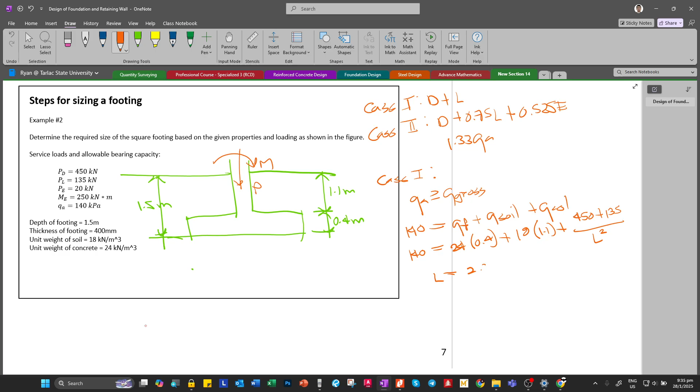So L is equal to: 140 equals 24 times 0.4 plus 18 times 1.1 plus 450 plus 135 divided by L squared. So L is 2.3 for case 1. To double check, substitute lang natin ito ng 2.3. So 139. Okay. Case 2.

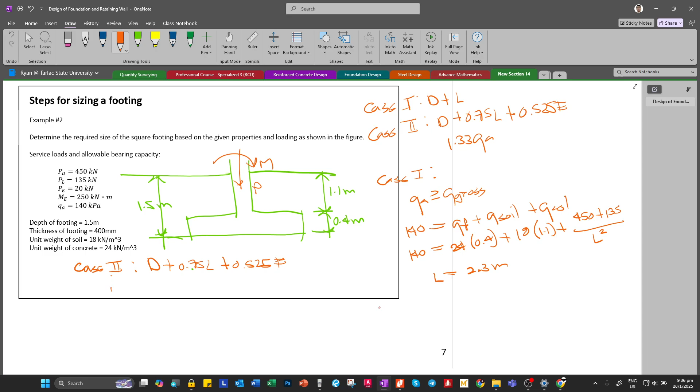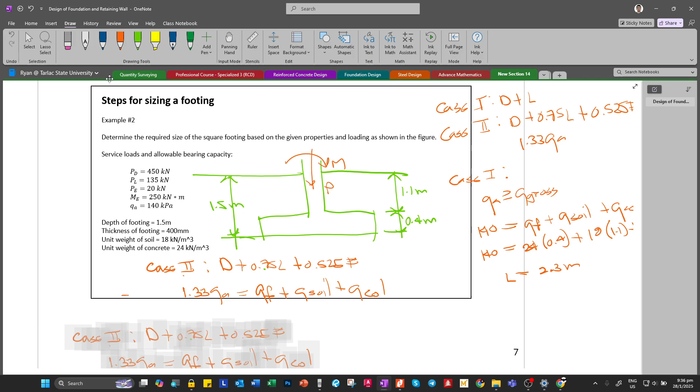Case 2. Dead load plus 75% of live load plus 0.525 E. The allowable bearing pressure can be increased to 133%. So 1.33 QA equal to Q footing plus Q soil plus Q column. I-shift lang natin ito. So una, yung pressure due to the footing,

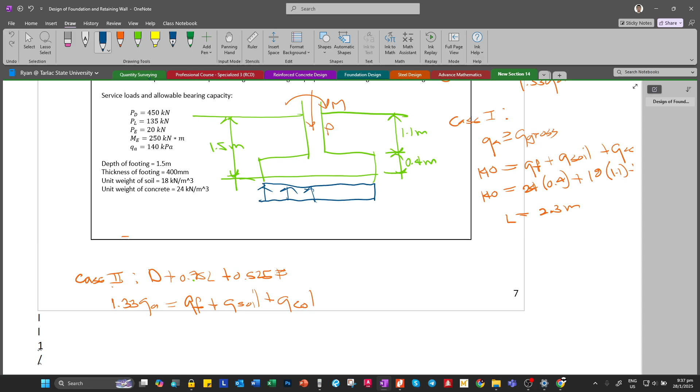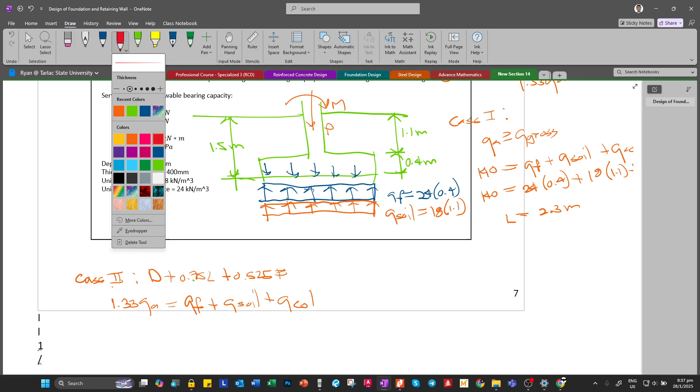so ito, Q footing, uniform yan, equal to 24 times 0.4, and then Q soil, 18 times 1.1, and lastly, dahil meron nang moment doon, di pa natin alam kung trapezoidal or triangular pressure. To double check, let us compute it.

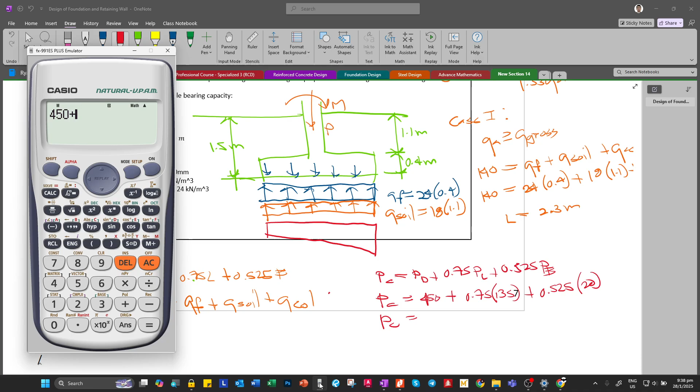So kunin muna natin yung mga unfactored loads. P column equal to PD plus 0.75 PL plus 0.525 PE. Ilan ito? So 450 plus 0.75 times 135 plus 0.525 times the earthquake load. So 561.75.

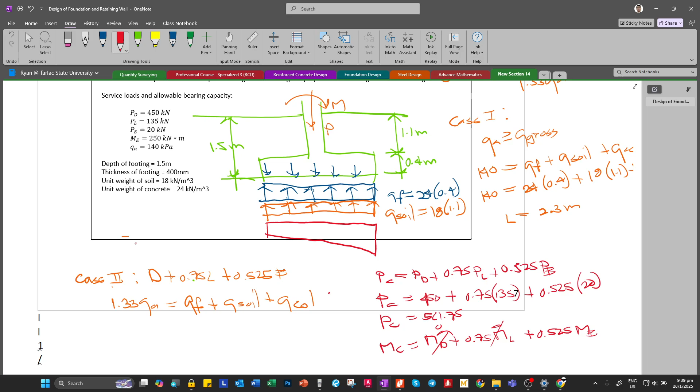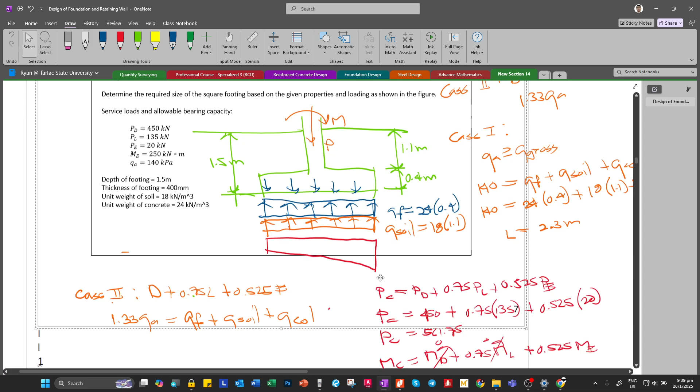The same is true for the moment: MC equal to MD plus 0.75 ML plus 0.525 ME. Zero din yun. So MC is equal to 0.525 times the earthquake moment, 131.25 kilonewton meter.

Double check natin kung yung eccentricity nito will exceed the critical eccentricity. But since wala pa tayong L, we will assume muna na the pressure is trapezoidal. Mamaya double check natin siya. So 1.33 QA, 1.33 times 140, equal to 24 times 0.4 plus 18 times 1.1 plus PC over A plus, ito yung kailangan natin sa Q column max, M column c divided by I.

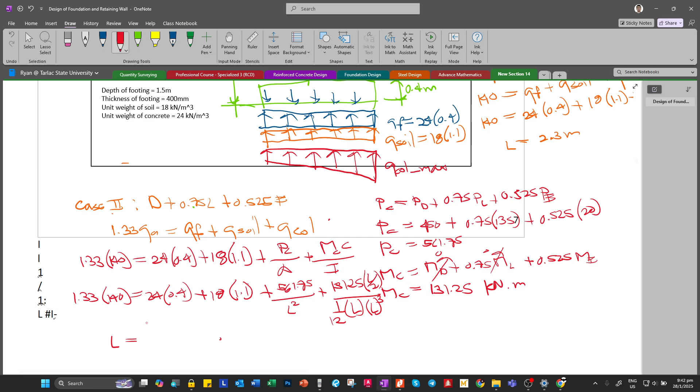So 1.33 times 140 equal to 24 times 0.4 plus 18 times 1.1 plus PC 561.75 divided by L squared plus M 131.25 times L over 2 divided by 1 over 12 L times L cubed. So solving, with x squared and 131.25 times x over 2 divided by 1 over 12 times x raised to 4, L is 2.4 meter.

So double check kung trapezoidal ba yung magiging net pressure due to column load. So L over 6, this is the critical eccentricity, 2.4 divided by 6, 0.4 meter. Compare this to the actual eccentricity, equal to M over P, MC over PC. MC is 131.25 divided by PC 561.75, 0.23 meter. Since this is less than the critical, the pressure distribution is indeed trapezoidal. So ganito nga yung pressure distribution natin. Ito.

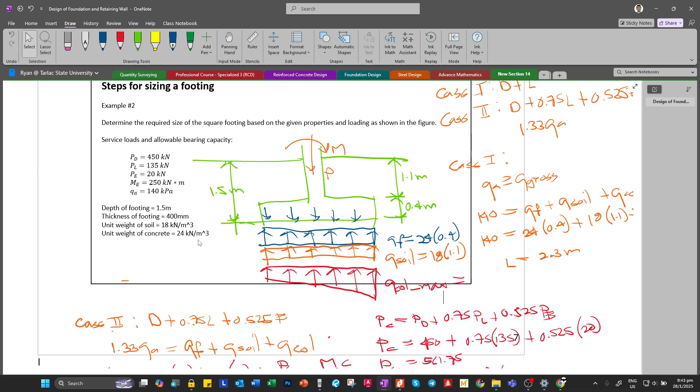Q column max is equal to 561.75 divided by x squared plus 131.25 times x divided by 2 divided by 1 over 12 times x raised to 4, with x equal to 2.4. So this is 155 kPa.

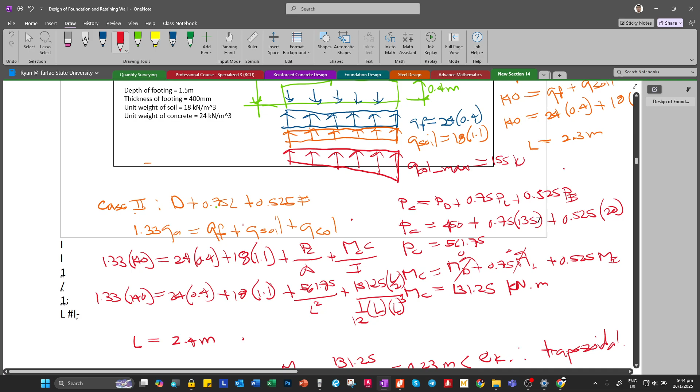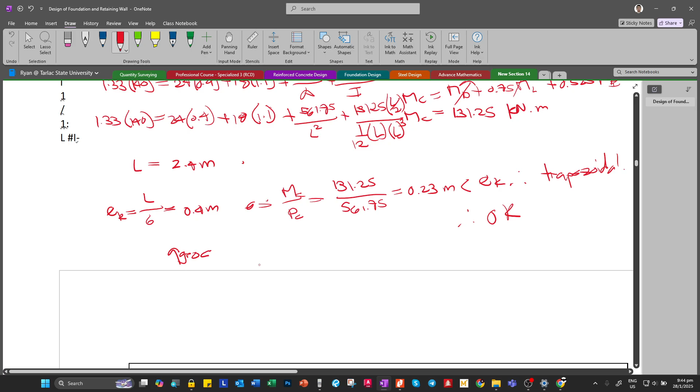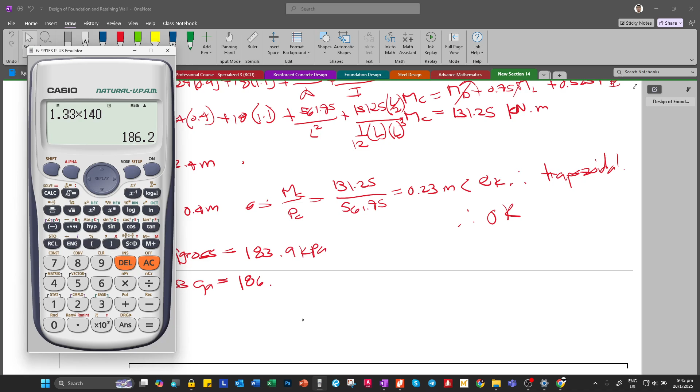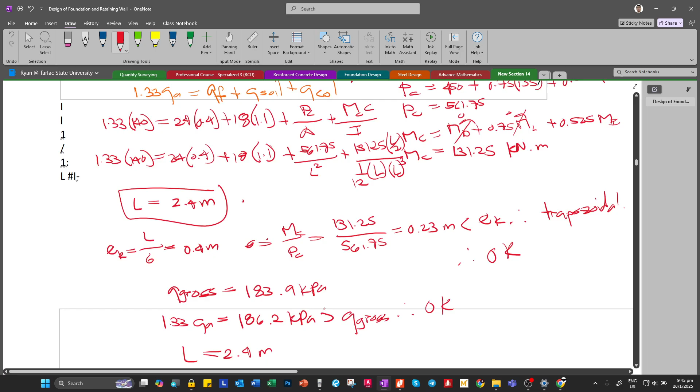So kunin natin yung actual pressure. Q gross is equal to ito yung column pressure plus 18 times 1.1 plus 24 times 0.4, x equal to 2.4. 183.9 kPa. Compare this to 1.33 QA, 1.33 times 140, 186.2 kPa. This is greater than the Q gross. Therefore, okay. Finally, L is equal to 2.4 meter. So instead of 2.3 from case 1, the governing is 2.4. So therefore, the final size is 2.4 meter.